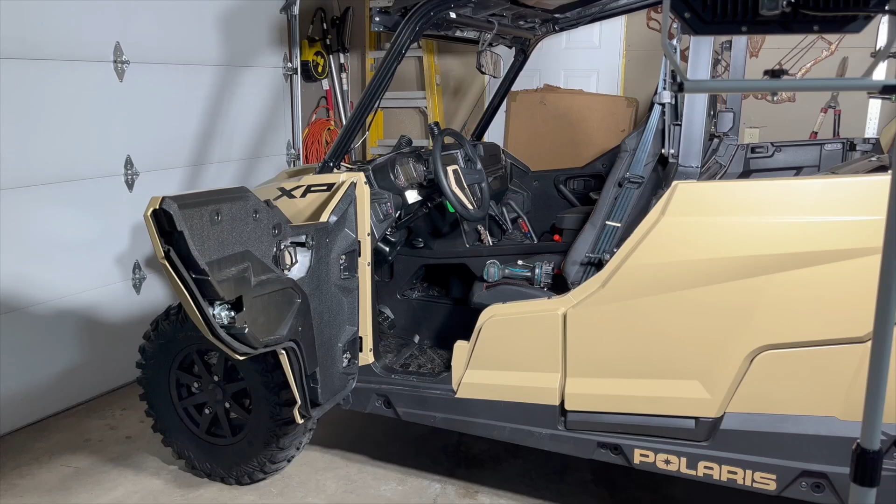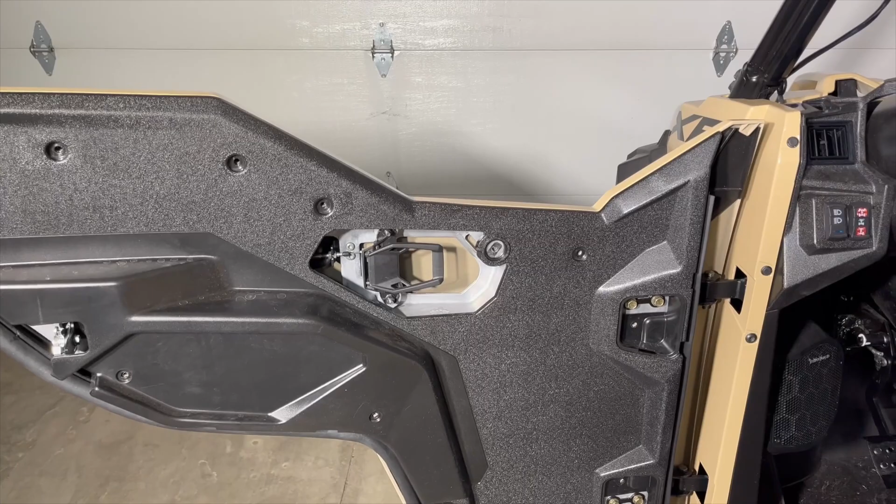Alright guys, so today we're going to start putting the Polaris brand upper doors on the XP4. So far all I've gotten done is got a T40 removed, then you got to pop these little caps off, which just cover up the hinge holes. Pop those off, and then you got some T20s behind there. Pop those off, take the inner door skin off, and then we can start laying out the door brackets.

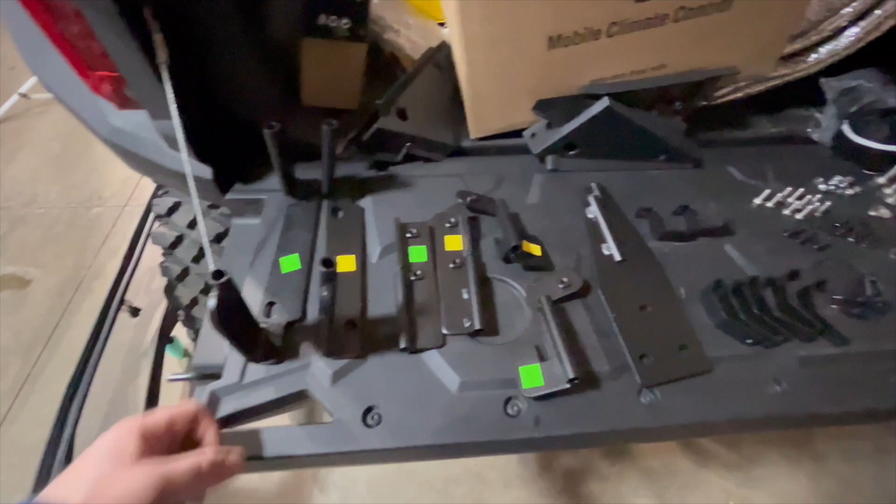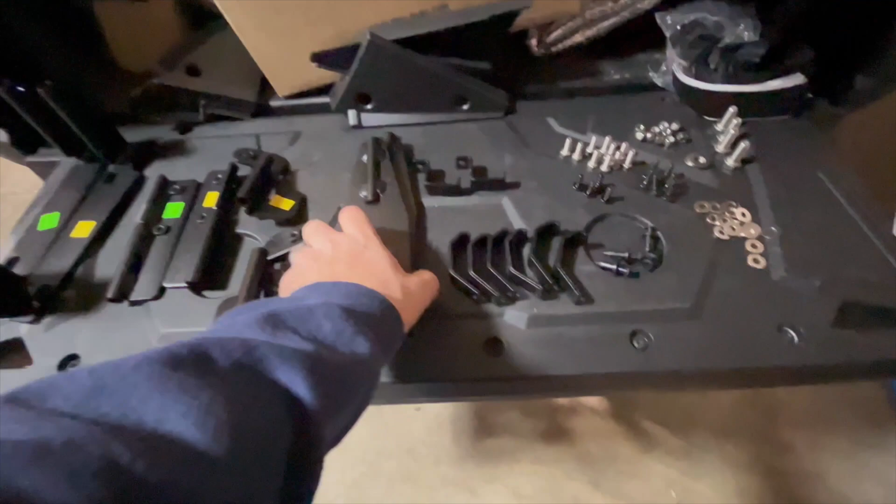Okay, so far we have the inner door skin off. We got everything kind of unboxed here. Obviously everybody does their thing their own way, but this is what I like to do, is just lay everything out so you can see what you have. There's all the inner skins, plastic corner pieces. Everything has part numbers on it. Obviously, you can see lefts and rights have different part numbers. The stuff that's exactly the same has no part numbers. So I'm going to read the instructions because there's actually quite a bit of stuff here. It looks easy enough, so I'm just going to start putting her together.

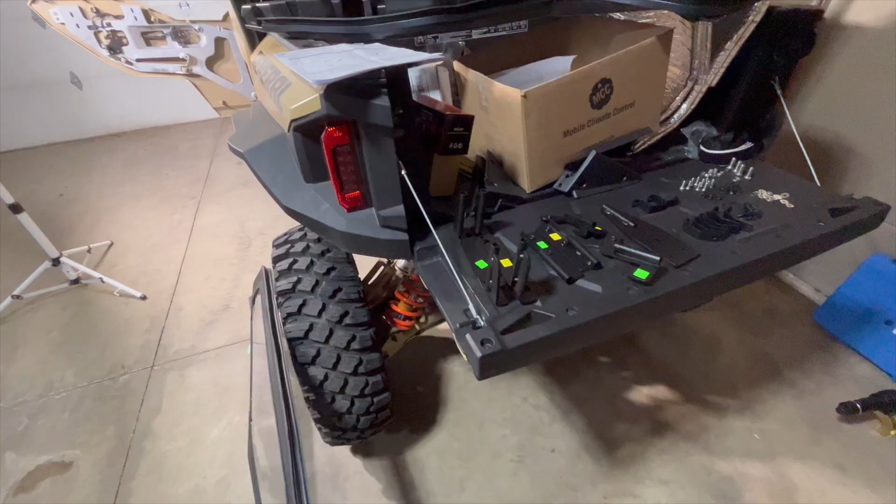All right guys, quick observation. So when I did my spike upper doors, I had to do some tweaking and bending, and I'm pretty sure I got them about as best they're going to get. But these front brackets here call out that they're the same part number. But if you look at this - I don't know how to get in a light - so this bracket's flat, the actual steel part, but look how the tube, the actual round tube where the door frame slides into, look how it's welded. It's obviously crooked. I saw one video from a different guy that had put these on, and the bracket itself was bent in or out, depending on which side it would have to go on.

So this one, I'm going to guess, is left. This is the same bracket, welded out. So even in the instructions, I don't see anything that calls out left and right, but these brackets are obviously left and right. On the bag, the part number is the same even. I hope the camera's picking that up, but it's definitely purposely welded so that it would tip out, or tip in, I guess technically is what it'll be in this situation, but tip in the top of the door.

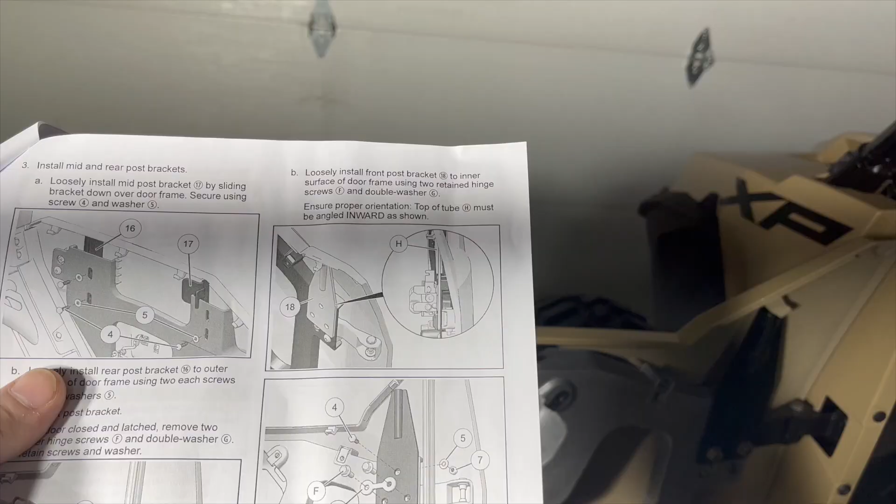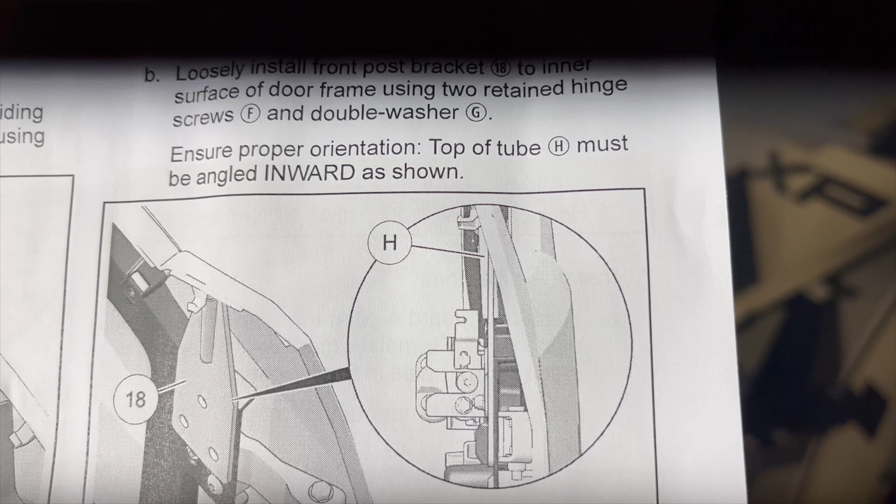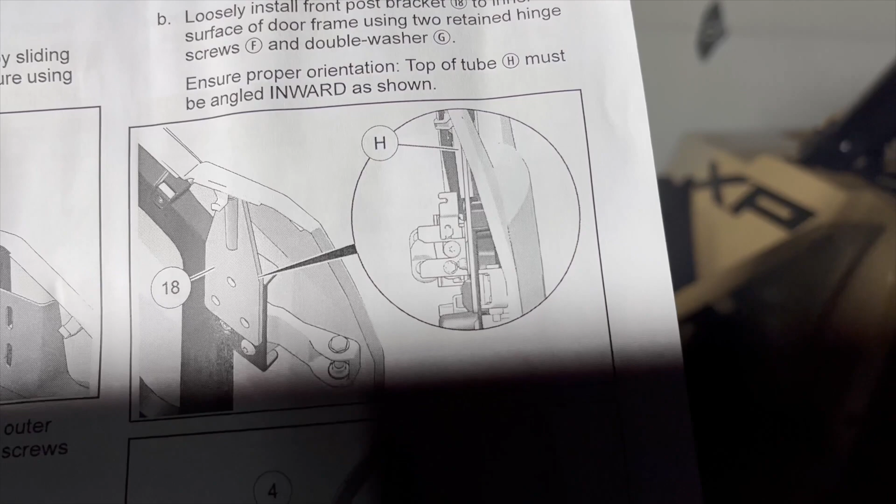Okay, so right here's the blurb about it. Ensure proper orientation. Top of tube must be angled inward as shown. It's not super easy to see, but you can obviously see that this is the straight bracket, and the tube is crooked, pointed inward towards the cab. So it does actually call it out. I didn't think it did, but I'm kind of to that point. So just so everybody knows, keep an eye on it. Like I said, it's the same part number, but it does have to actually be tipped. I don't know how good that's going to pick that up, but it has to be tipped that way towards the inside of the cab.

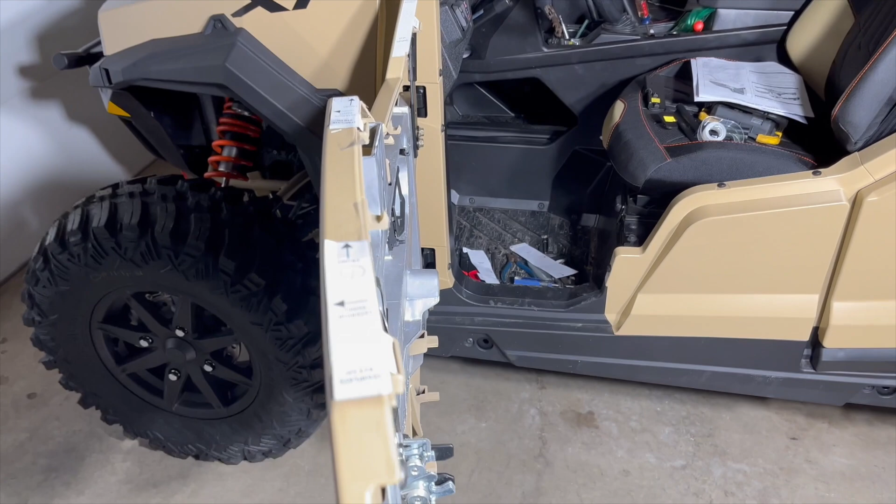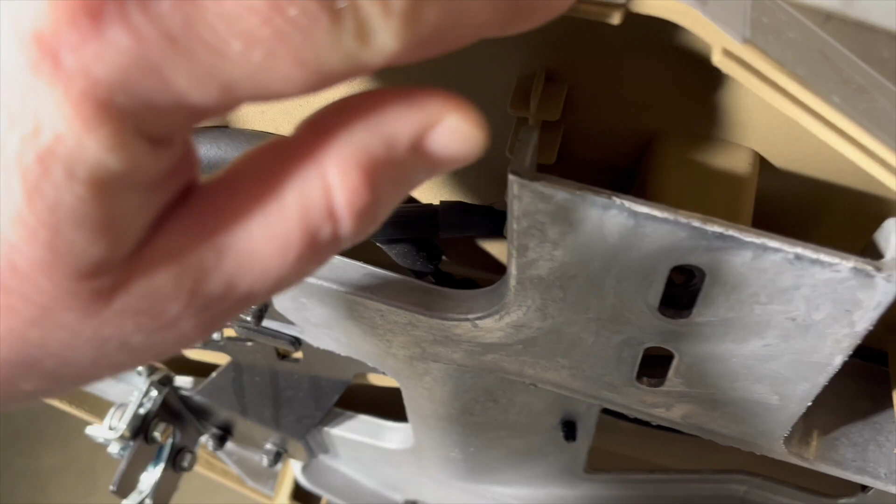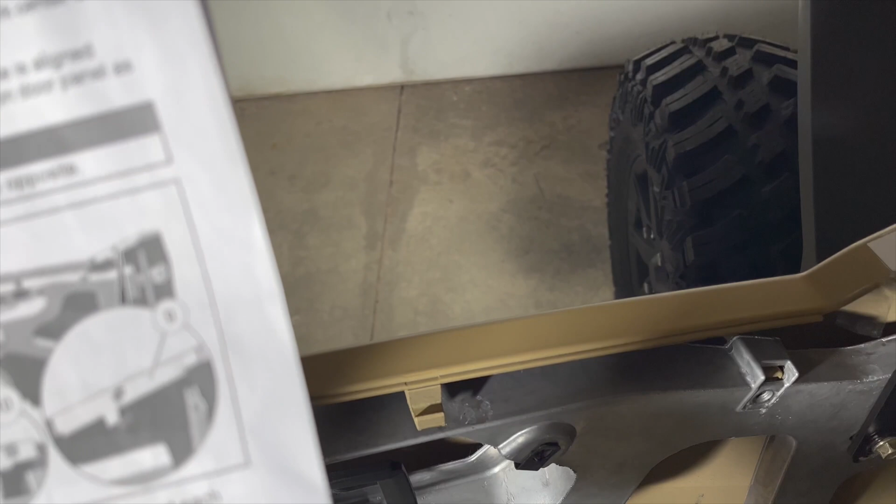All right, so here's what we got going on now. Got my templates cut out on the back side of your directions, cut them out. Kind of tells you where everything needs to go. These are the first three that you're supposed to do. It says in the instructions, the inboard lip should line up with the inboard of the template. So you get these little bend lines. I would assume this is what they mean by the inboard - I forget the actual verbiage they used. Let's take a peek here. Ensure inboard edge of template is aligned with inboard edge of offset lip. So I'm hoping that's correct. We'll find out here real shortly.

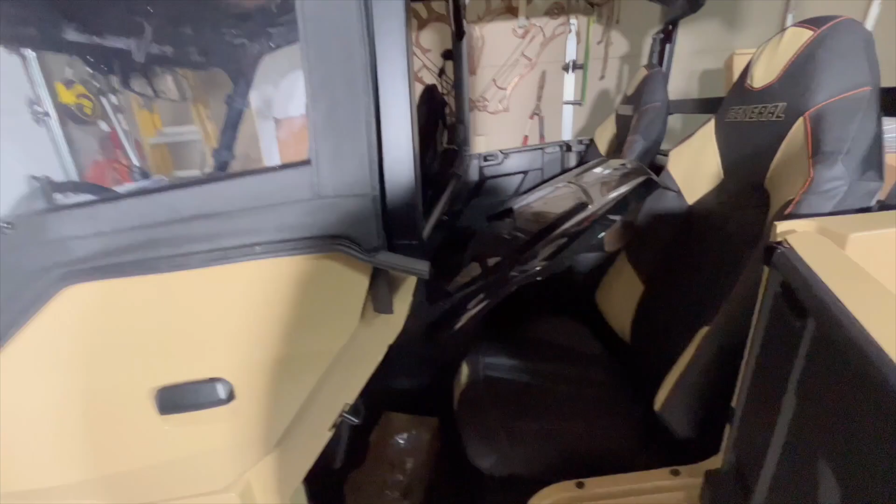All right, guys, so you know I'm picky. I've been at this for quite a while, fitting this front door. The fit on the door is better, I think, than what the aftermarkets are. I've bent and tweaked and moved, and I got a few more things to try and to do. So right here is pretty close. Obviously, I don't have the back doors on it yet, but it looks, you know, it fits pretty decent here. I mean, we got some gap.

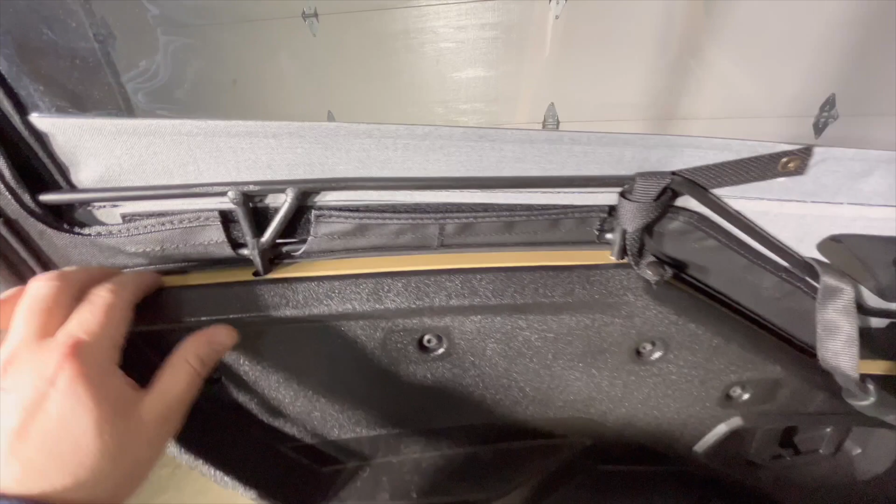First thing I did is pull in the striker, move this inboard so that it touches here tighter, and fix this up so the door gap is actually pretty nice.

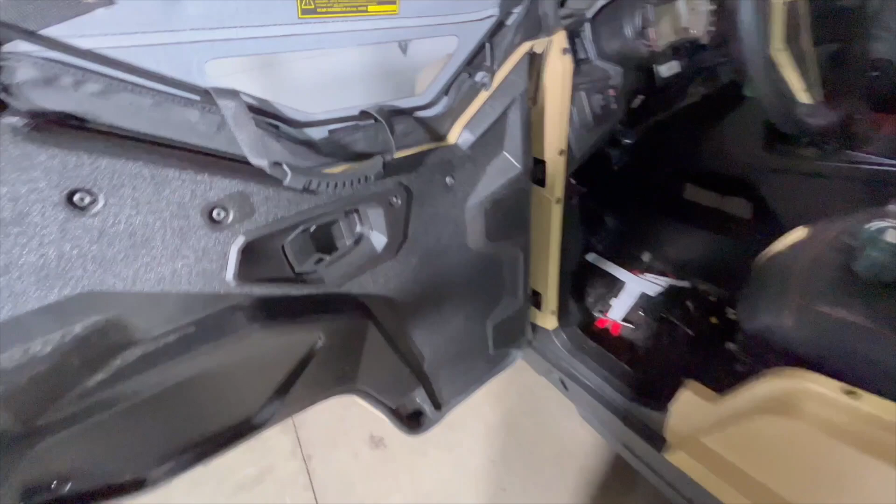What I found is that the insulation goes out. I think once this bottom insulation here settles, this here is actually an insulation strip, and it seals up pretty darn good. Obviously they've been sitting in boxes, so once it's been sitting here a little bit, you're gonna notice there's just the tiniest gap, you can't even see it from this side.

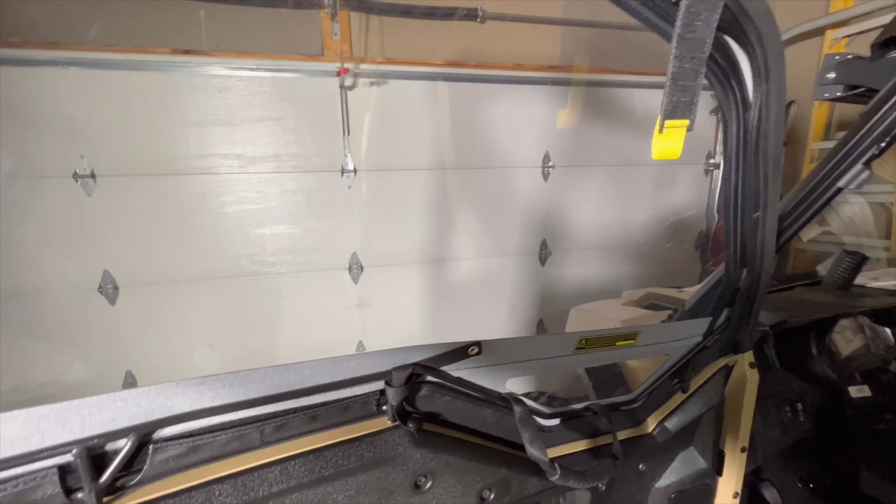Again, I'm being picky, but I think once that insulation settles, you're gonna see that go away. I did have to bend a little here on the frame to make it mate nice, and then bend here on the frame a little bit to make it mate nice up here. So I gotta work on this section to get it to fit a little bit better. I think possibly adjusting the hinges is gonna be the ticket on that.

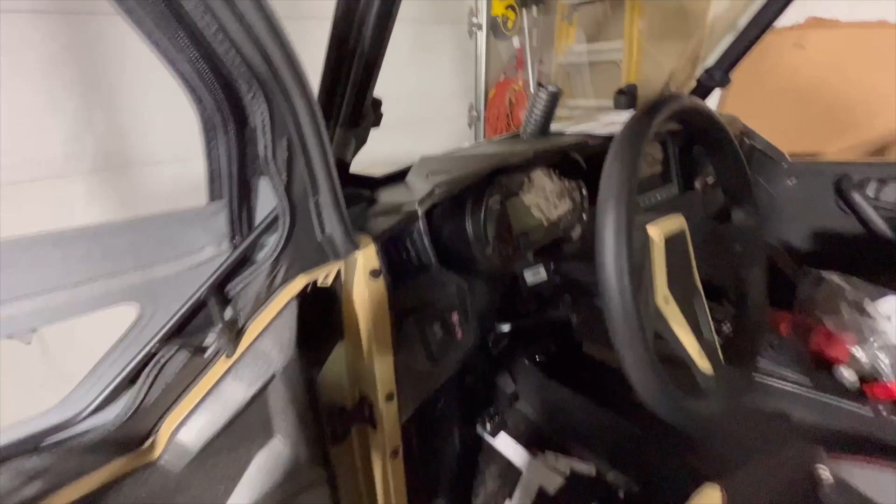I did run into a little bit of an issue with these corner pieces. These corner pieces that fit in here seal up the rest of that front corner and are great, other than we went to a different kind of lock and ride window. So this one snaps, you just pull it over and it snaps off like that, versus the old style was you turned a quarter turn and it locked over. This is by far a better style.

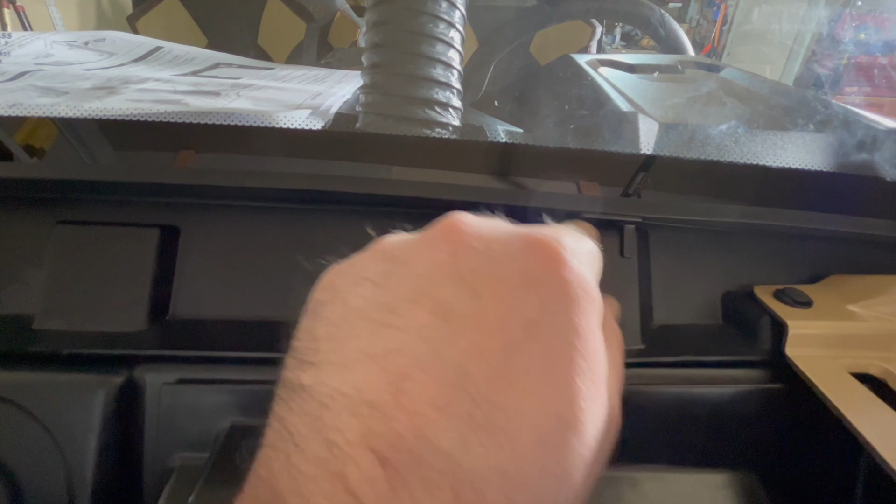Couple things about it: it feels to be heavier, and it definitely seals better. I ordered blocks for mine, you sit blocks in here. I had rubber in it for a while, and I ordered some blocks from Derek Goetz, who does some 3D screen print or 3D printing, and that worked on mine. Now this just has a metal piece so that this thing can't move, but I think the way it hooks on the roll cage, it's not gonna move anymore anyway.

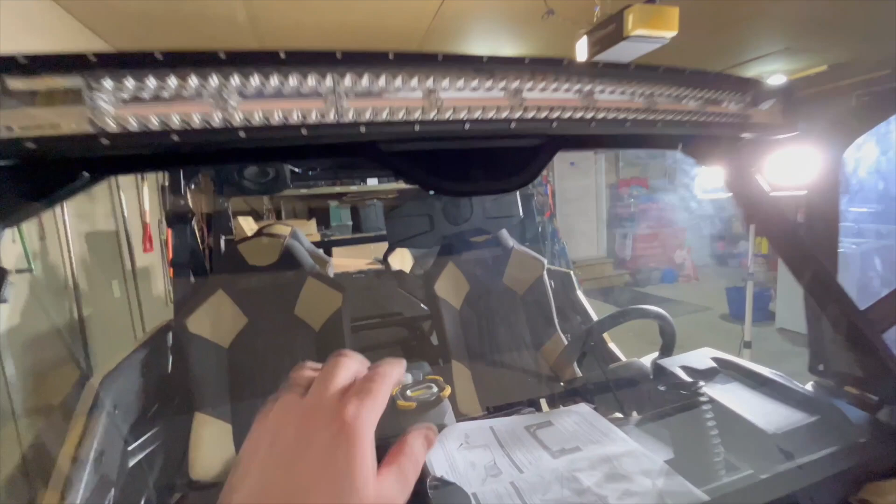The other thing that's nice is instead of having that square shape where it comes down like mine, my two-seater, this one's rounded. So I'm hoping the pattern for the escape wiper is exactly the same, and you'll be able to run either stock with a 17-inch wiper or possibly even an 18. I forget, mine's a 17, and it covers the whole window. But I had to drill out a rivet on the arm and slide the arm out and put a shorter wiper on it so it'd miss more of this. I think that's gonna be pretty nice.

But now that has the issue of this corner piece. So I'll talk to my dealer on Monday, see if there's a revision for these doors, if this is an older revision or something. If not, I may have to just notch that plastic to go around the actual clamp. Not a big deal either way.

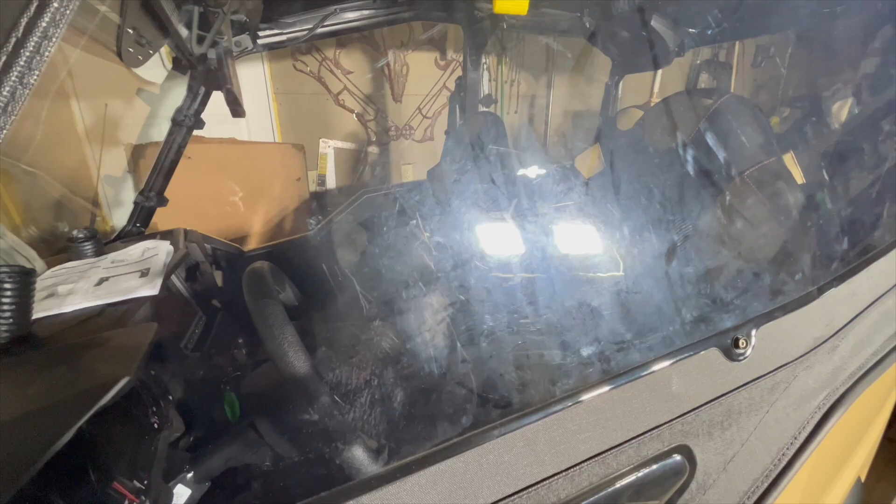But so far, it's looking pretty good. I really like the way that these fit. This plastic is super clear. Obviously, once you roll it down and stuff, it's gonna be a different story, but most of the other aftermarket doors come rolled up and you never seem to get that real clear look. These actually say Bestop on them, like the Jeep manufacturer, so I think it's gonna be a better quality product, I guess.

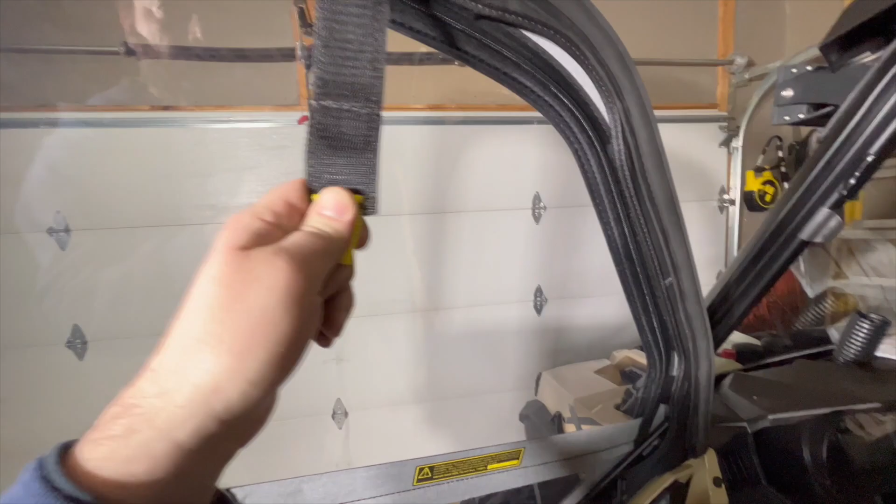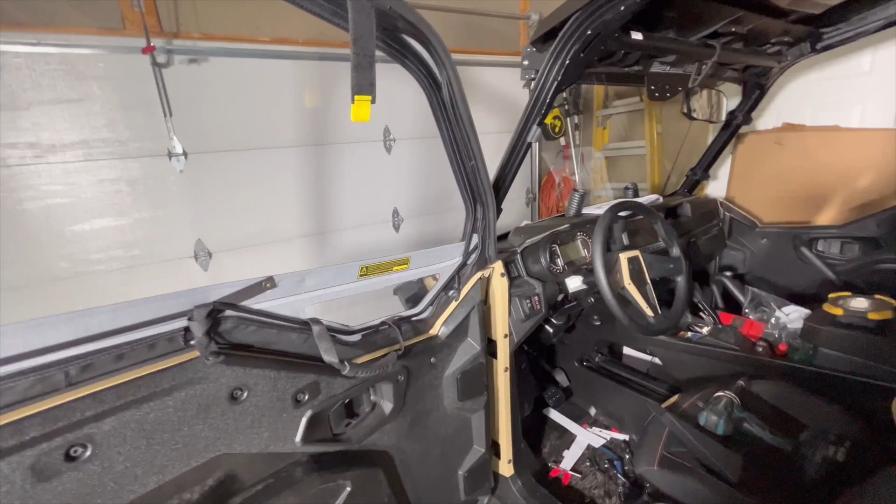The other thing is, I haven't done it yet, but this loop here, kind of like the Seizmiks, you put Velcro on your roll cage here, so when you're going a little bit faster, you can pull this thing over and latch it so the door doesn't buffet out when you're going. Like mine, if you're going over 50, the door will start to kind of open up just a little bit at the top and lets the heat out, sucks the heat out. So I think that's gonna be nice.

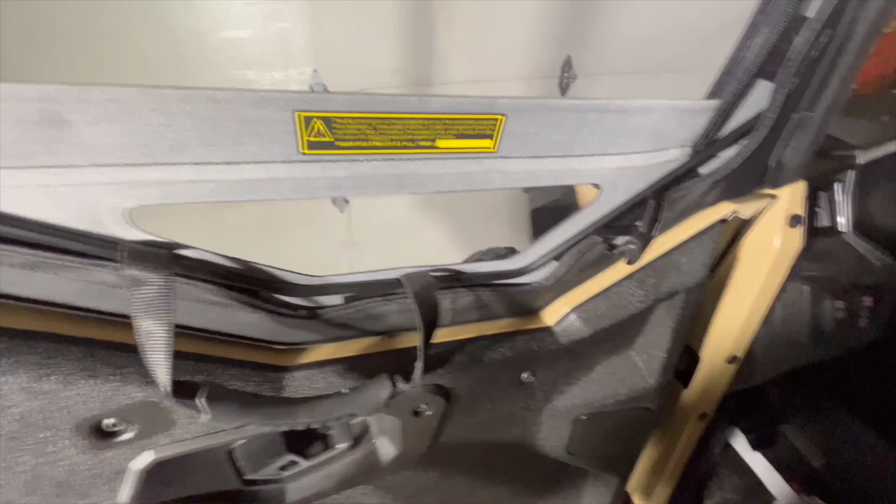Otherwise, they're easy to install. As far as that goes, directions aren't too bad. I've done them before, but if it was your first time, no, they're not super great.

But I think I'm gonna like these better than what I have now. So we'll get the backs on and the little triangle pieces on the back here, and we'll see what one whole side looks like. We'll see how they seal up.

And then we'll finish enclosing this thing in and do some videos on the Polaris heater versus the Inferno's heater, and then Polaris upper doors versus the Spike upper doors I have in my two-seater, and then Seizmik - I've already done one versus Spike on. So just kind of give everybody an idea of the different things that seemed to be working better or not working better.

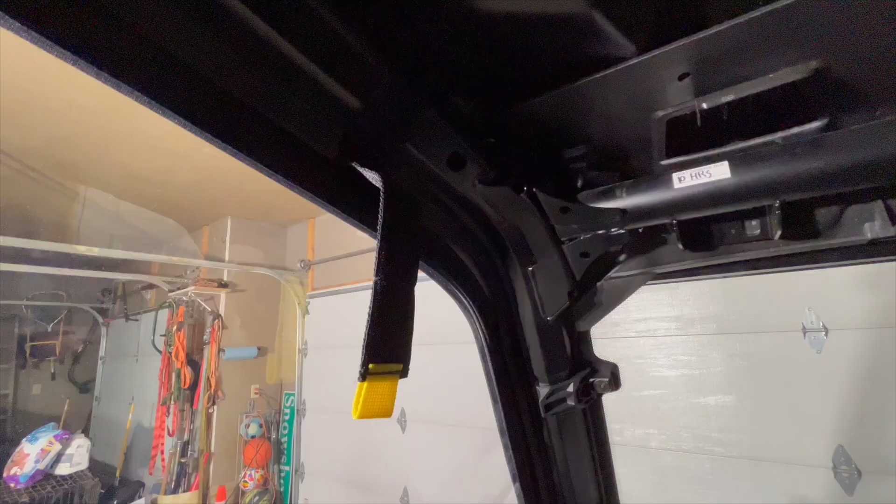All right, guys, so the front one's on. We're gonna start putting the back together. Get the rear piece that goes in this area here, and the actual back door upper. And then we'll see what we gotta adjust with the front, if anything.

I figured we might as well start putting this one together and get all the back of it done, and then we'll make sure that the front one closes, the back one opens, there's no interference there.

40 Torx, there's 7 of them. Pull them out, take the inner panel off, and we'll get started putting the brackets on.

All right, guys, the front and back is on. Obviously got some trim work and such to do yet, but gaps are pretty darn good. The back fits really nice, actually.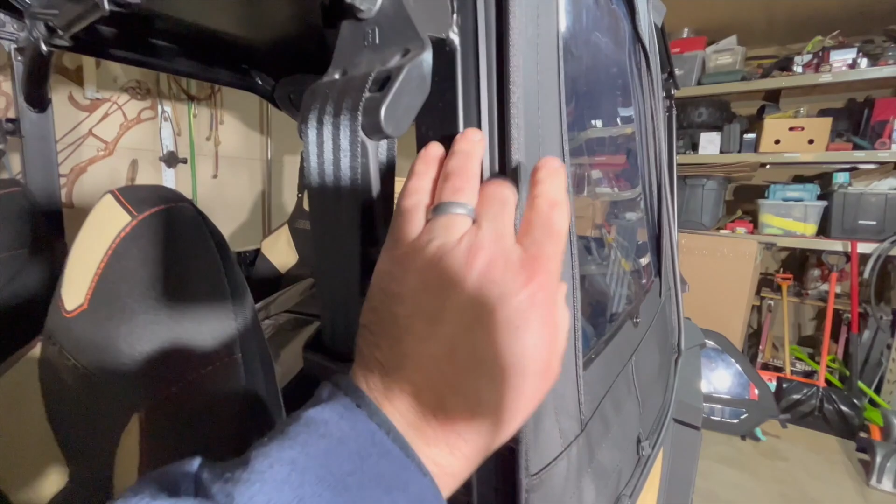So one thing that I did find in doing this - obviously the first shot at it - I had to grab the door, give it a little bend to make this side fit nice and tight. Now the top's really good and tight here. Once we push these down, that looks really good. There's not much of anything there.

What I did find is that I heard some guys that had issues basically between the front and the back doors. If you pull this Velcro loose and just pull it tight over, that'll kind of suck this part of the door in. Now you got a nice tight seal here, tight seal on top.

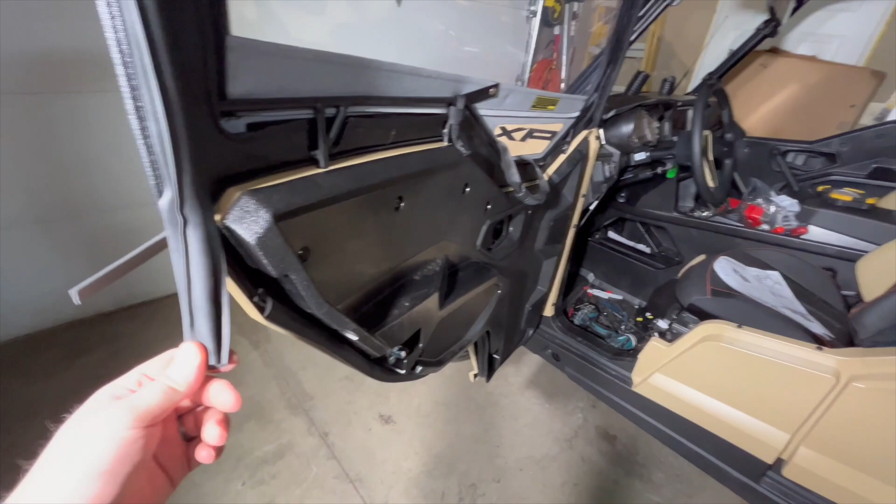So next will be this little quarter window, I guess we call it, and we'll see how that goes. And then I'll hopefully be able to start trimming off the excess insulation, or whatever we want to call this, and putting it all together, making sure everything lines up good and checking door gaps and such.

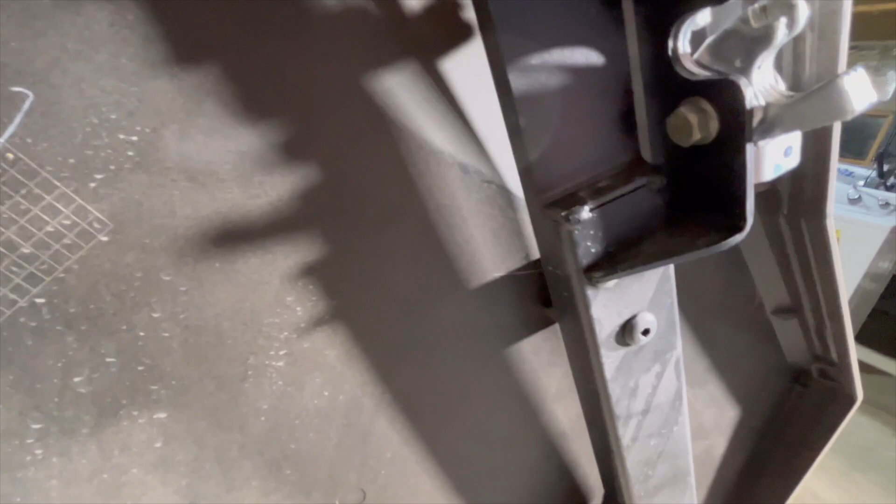The striker on this is not really adjustable in and out on the back doors, just up and down. So I think you could probably get it even tighter if you could adjust that part of it. I don't think this has any adjustment. No - unless they're adjustable here. No, that's all welded on. So we'll make it work.

It looks like they're going to line up pretty decent, actually, though. So we'll get the back one done and then see how everything looks together. Like I said, we'll trim off all the excess and make that look nice and clean. And then onto the other side.

All right, guys, I think I'm just about done struggling here. It's coming out pretty good. I guess I'm just too damn picky for soft panels and how these things fit.

I'm a Jeep guy, I'm an off-road guy. I don't mind getting dirty, dusty, cold, whatever. But, man, you really gotta mess with these things a lot to make them up to par. Again, just like my other Spikes, they should keep the water mostly off you. They should keep the cold mostly off you. They'll even block out some dust and snow and whatever else. I guess at the end of the day, that's really what they're for.

Again, I'm pretty darn picky. I gotta figure out this corner piece - they changed the windshield, so. But they look pretty good. The doors close good.

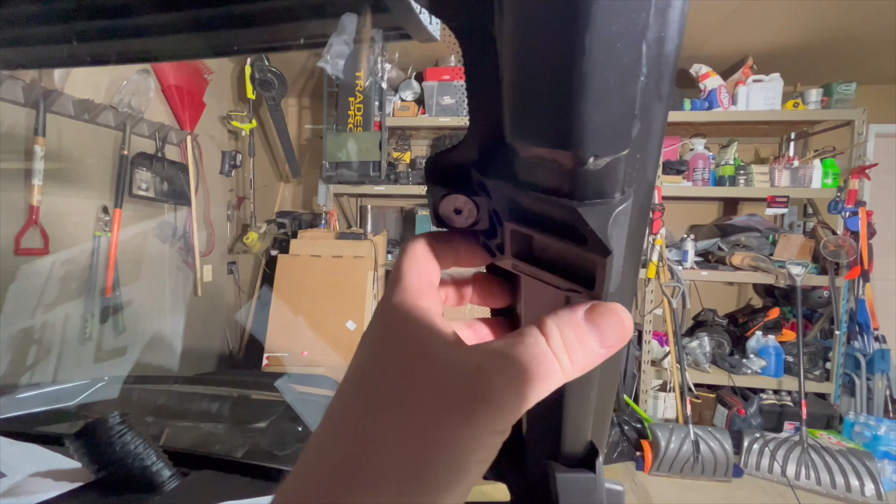But so what you got to do is you actually got to cut a little notch. Just use a utility knife. You could use a Dremel, I guess, but it's so much cleaner. Score it a little bit, and then it goes right through, so that you can get those corner pieces in.

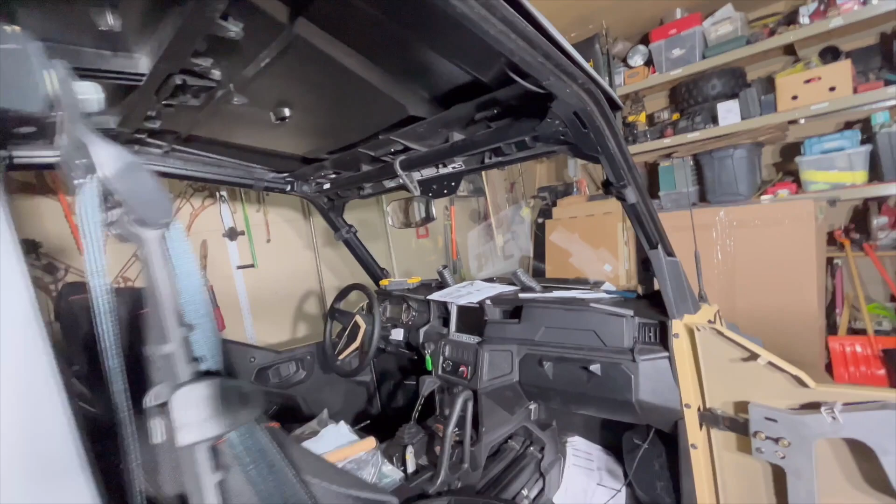Doing the same thing to the other side. And then I'm going to finish putting the doors on this side, and I'll have all the doors about whipped. So it's looking pretty good. A little time consuming. Like I said, you got a lot of adjustment and tinkering here and there if you're picky, but I think it's going to be worthwhile.

All right guys, so I'm finally happy with the doors, happy as I'm going to be. A lot of poking, prodding, playing. Finally, what I ended up doing as far as the insulation wise is instead of cutting these right off, I guess what everybody does is cut them off, I actually took some super glue that's like a gel, and I just glued it on the inside.

I mean, why not have this extra piece of insulation here sealing it? Same thing with these edges. These edges wanted to kind of fold back when you closed it, and it would change every time. It was driving me nuts. So I did the same thing here because it's only sewed to like right here. So this edge would peel up, or it would hit this edge and fold back. Really noticeable on the back doors.

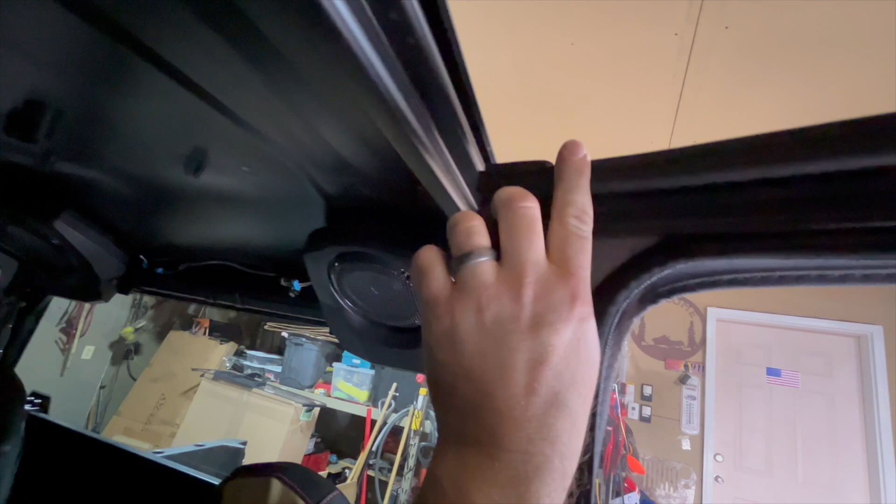This top edge right here, you close the door and it wants to roll back to here. So then you got this 2 or 3 finger gap that you can see air through. Again, maybe I'm being picky, but I did that gel super glue there and did the same thing right there. So now when you close the doors up, everything's sealed up, nice and tight. Nothing's rolling back. Did some insulating behind the seats. Sound deadener.

Doors shut nice and tight. They look good. We took her for a rip the other night. It was like 8-10 degrees, pretty cold out, pretty windy. Me and the 4 boys.

And she's pretty warm in the cab. Like I said, I wanted to get a few things more sealed up. And now it's about doing some more sound deadener insulation in the cab. Once I get my bumpers and winch and all that stuff, so I'm going to basically run all my wiring through that center console on the bottom. Then I'm going to insulate all that on the inside.

Because basically it goes straight through. All of this stuff, you pull these cup holders out, you can see the ground through the skid plate. Which I'm changing out the skid plate, but you're still going to have cold air blowing up through there from the front. So I think that's about it for the doors. We got a lot more stuff to do, but she's sealed up and warm now.